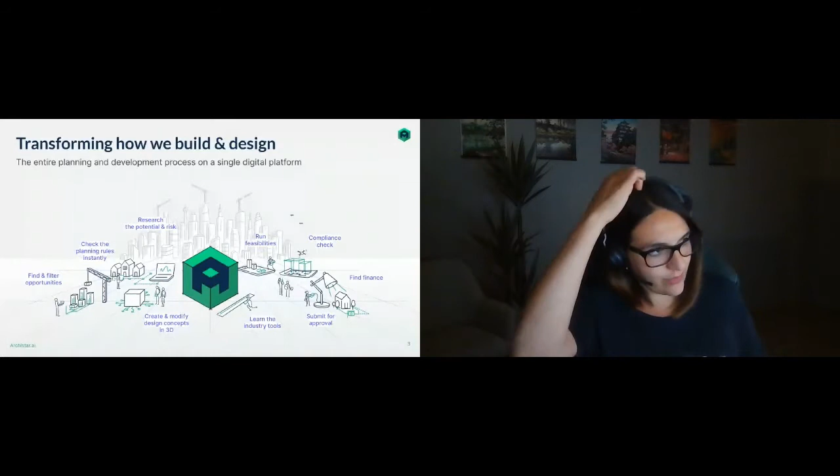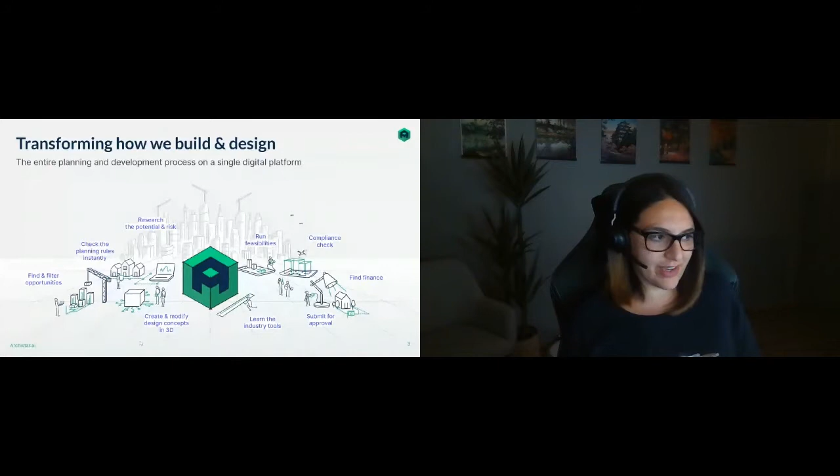First things first, we use it to find and filter opportunities. We use it to check the planning rules instantly anywhere around the world. We look at researching the potential and the risk of that specific design and development. From there, we then create and modify design concepts in 3D. We run feasibilities, we run compliance checks, find finance for those specific developments, and then go to submitting for approvals.

The idea here is that at Archistar, we really are trying to find a wholesome product that goes from finding and filtering opportunities all the way through designing, feasibilities, compliance, and right at the end, submitting for approval. So finding that whole design workflow as we go along.

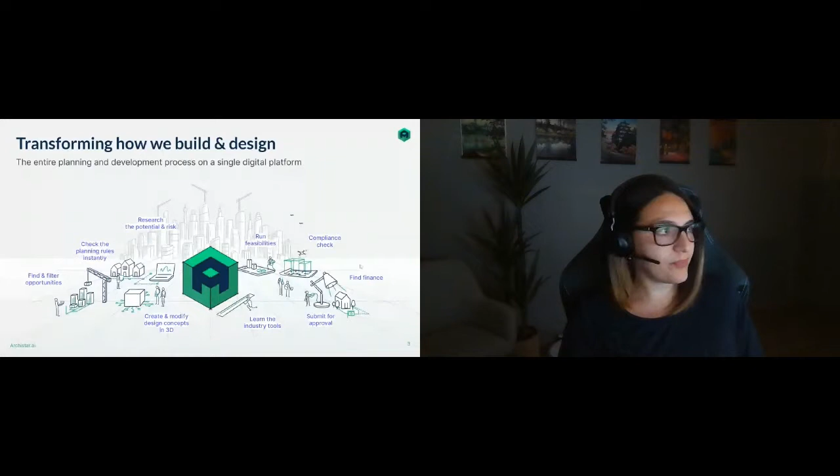Our clients and partners that we currently work with worldwide, a few big names there: CBRE, Colliers, Frasers Property, all the way through to some of these larger technology companies that we're familiar with: Autodesk, Rhino, Revit, and so on.

Like I said, we are based in Australia, however, we are a global company. In Australia, we look at mainly property developers, architects, designers, real estate agents, all the way down to home builders, banking, and universities.

And from universities, that's kind of where we started. Around the world, we have over 1,000 property and design professionals on our platform, and we actually have a lot of students on our platform. I think that number's a bit old, but it's around over 70,000 students now on our platform.

The reason is because we actually started off as an online academy. So we currently have Archistar Academy still going live, still going strong, and it's in all the major universities around the world. What that does is provide online learning for the AEC community on all things to do with generative design, photorealistic rendering, and all the main kind of programs to look at.

So Revit, Rhino, Grasshopper, and that's kind of where we started 6 or 7 years ago now, creating these online tools, really kind of teaching people from the ground up what the latest and greatest is in generative design. From there, we kind of said, okay, well, how can we start using our skills to start shifting the curve of what generative design looks like in the current architecture, engineering, construction community? What does this look like?

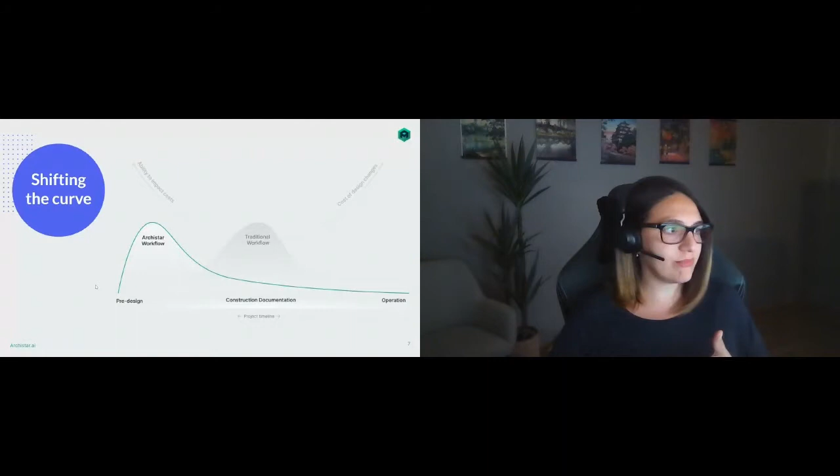So what we do at Archistar, we bring that large curve right up to that very initial stage of pre-design. So we look at, okay, firstly, what does your building look like? Is it in the right orientation? Is it going to comply to all your certain parameters and your workflows for your country and so on.

And bring all those quick back-of-the-napkin sketches right to the very beginning of that construction process. The reason we do that is because all those initial costs are quite cheap right at the beginning, so any major changes you make would be right at the beginning there rather than in the middle, and therefore that will reduce costs. It will increase speed later on because you have to make fewer changes and you'll be more precise in your workflow from that point onwards. So we're very much all about shifting the curve here at Archistar, and the things I'll present to you today will show exactly how we do that.

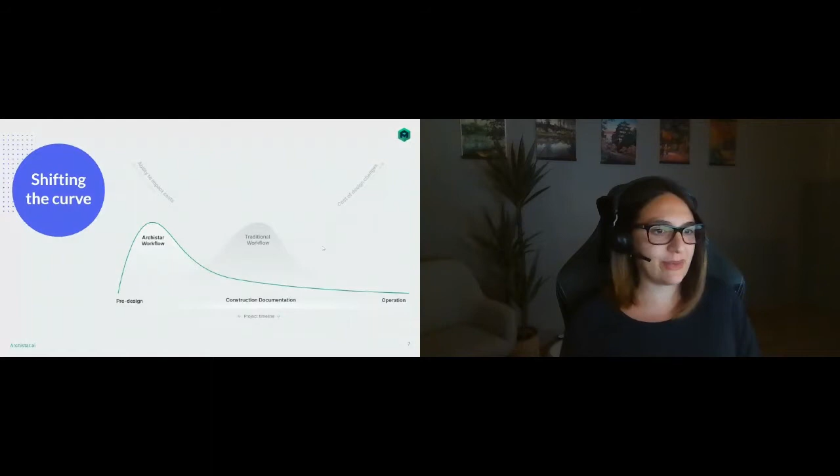Okay, so let's look at the key concepts and past applications for generative design. At the beginning, I always try to give a simple explanation of what generative design is, because it can get quite complex quite quickly.

So for example, if we're looking here at the design of a chair, we say, okay, what is this chair made up of? On the left it looks like quite a simple geometry, but on the right-hand side, when you start to break it down, you start to get all these different parameters. For example, here you have the width of the chair, the depth of the chair up to the seat, the whole height of the chair, the height of the armrest, and the depth here. So you really can start breaking these down into numbers, into geometry, as you go through.

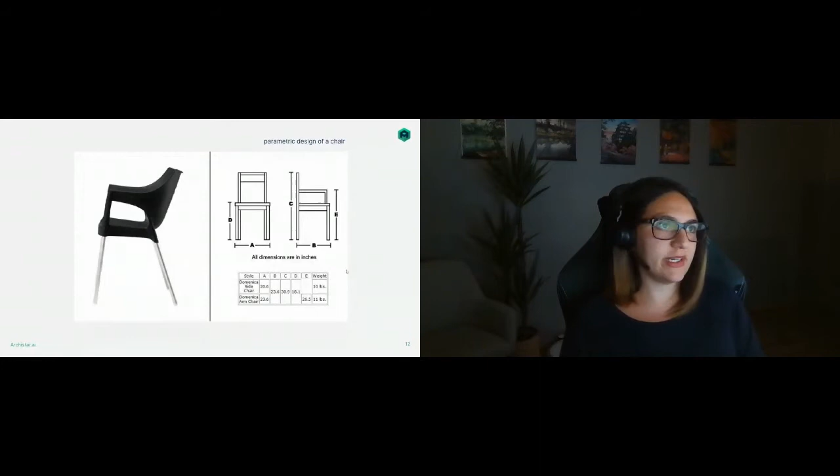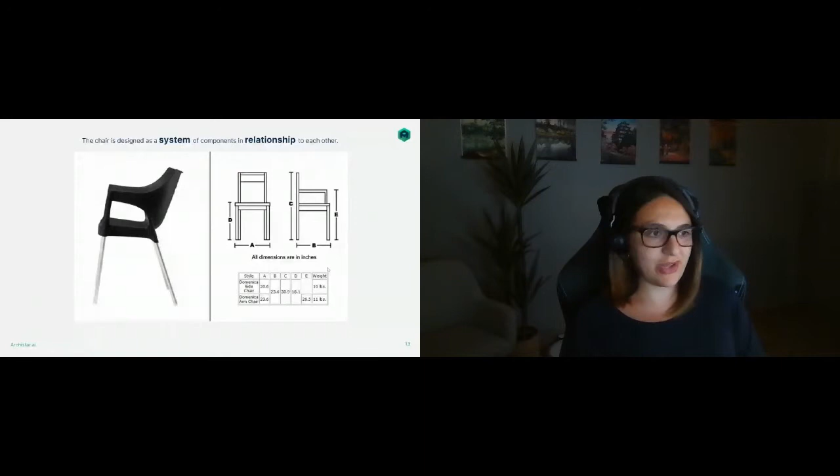By breaking this down into these parameters, you can then start creating a system of components that have a relationship with each other. The benefit of having that is that you say, okay, well, this is my chair, these are my components, and these are my variables now. So this chair is now just broken down into geometric relationships, all those different dimensions connected to each other, and these numbers now become your variables.

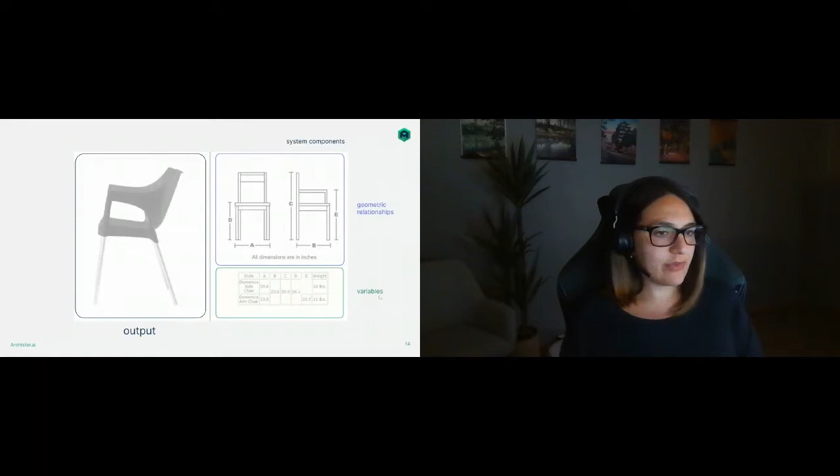So what happens when you change these variables is that the output now changes. If I change the width, if I change the depth, if I change the height, I'm going to see different versions of this chair appearing to me. Rather than having just one final output of a chair, I now have a system I can create to produce multiple chairs at once.

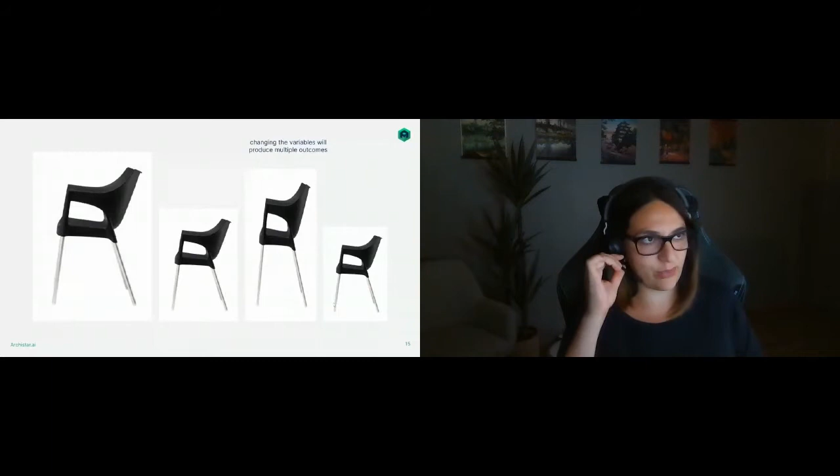So now we go into what we call simple systems. Rather than having one final design, you can start creating a system that can give you multiple designs. Rather than going from one chair, you can have 10, 20, 100 different chairs going forward.

Another example here is how this circle geometry can be affected by a simple radius from a point. If I start by initially saying, okay, my point is this close to my circle here, what happens if I move my point around? If I move it closer, is it going to shrink? If I move it further away, is it going to increase in size? How is this geometry affected by an external parameter?

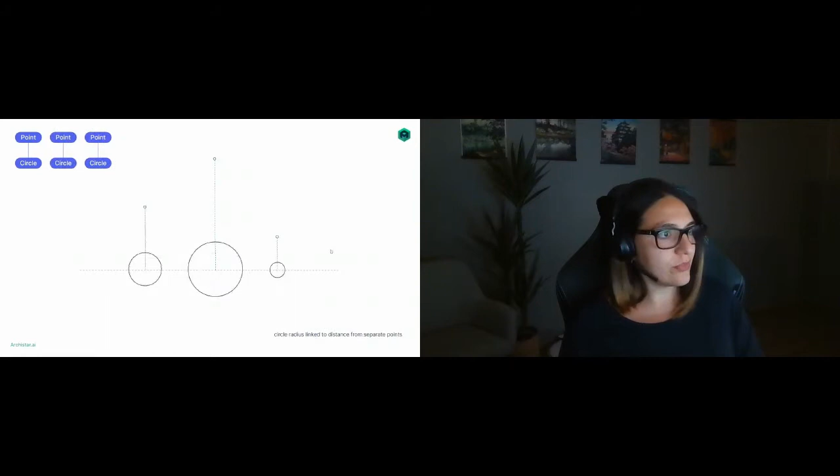So what happens if I do this for multiple points, and I drag multiple of these points around? How are these going to change according to the distance from certain points? And we say, okay, well, what if it's all from one point only? The further I move this away, the larger the circle gets; the closer it is, the smaller the circle gets. And you can see how now we've kind of created this system.

Of designing, where we have a circle that's linked to a distance from a single point. So how can we start bringing this into your architecture? This is kind of where we can bring in components. We've created a system, and now we're creating components that react to that system.

For example here, if I had a surface with 3 lines, one on this end, one in the middle, and one on the closest end to us here. What happens if I say, okay, this panel is going to twist according to a certain angle using my middle line there. And when I twist that, that component changes accordingly.

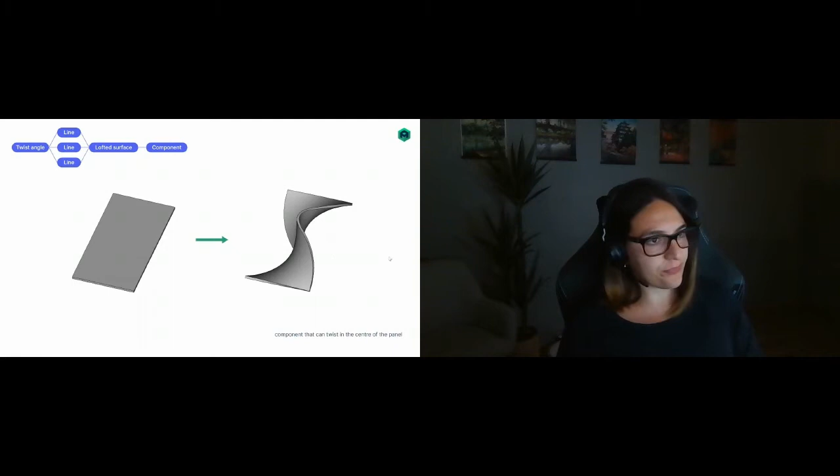For example, here, if I bring 6 or 7 of these panels close together, and they currently have no twist angle, and then all of a sudden I add in an angle, as we twist against there. You can see how we can quickly start to create this very parametric design. And this is with one angle there.

What happens if I bring in that point system? I say, okay, according to this point here, any panel that is closest to this point gets more of a curve. I can start bringing in a law curve into this and say, okay, well, if I have a curve that has different points of highs and lows, my parameters are going to change accordingly. And I can start getting these really funky designs out of it.

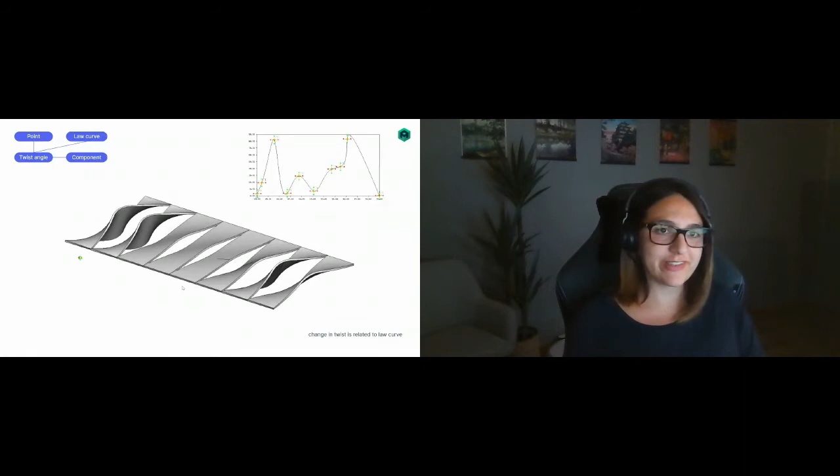So you can kind of see very quickly how some very simple systems and components can very much affect how we create new architecture, create parametric design, and get to some really funky designs in the workforce.

Grimshaw, they have a very simple system like this where they have different panels with different twists and turns, and you can see how easily you can start creating these really funky designs that are currently out in the world of architecture. Even the same thing here.

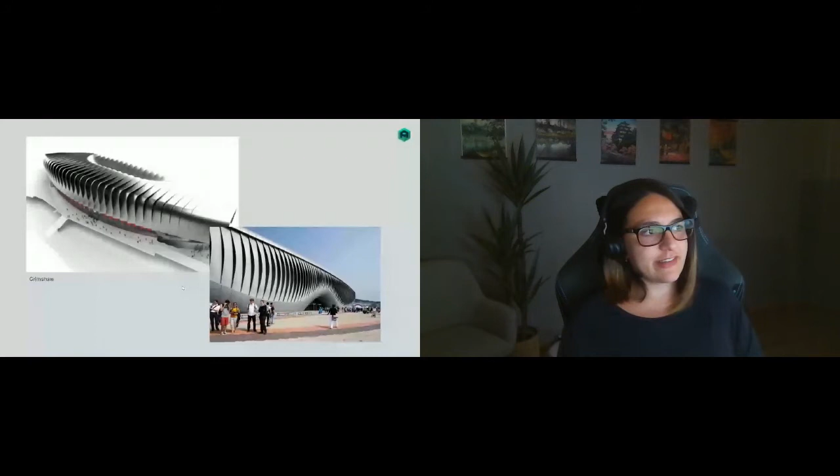So I guess once you actually start getting to these funky designs, you say, okay, well, actually, how do we build this now? It's like, this is really cool, but what's the next steps from here? How the hell am I going to build this thing? This seems crazy.

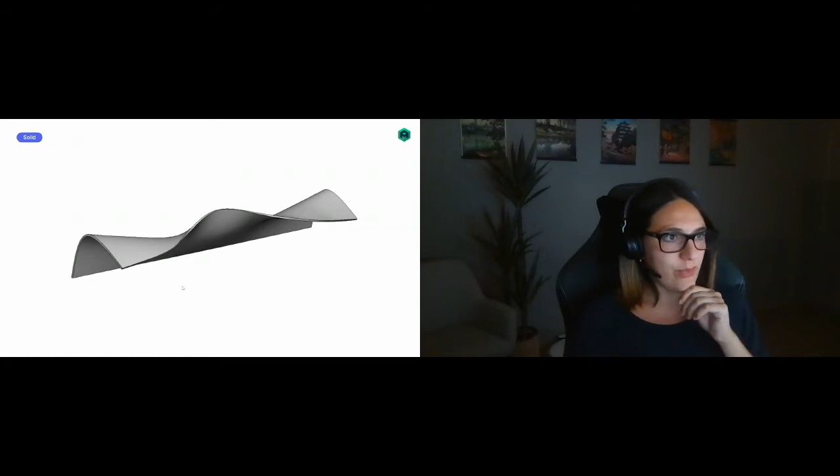So this is where parametric design also comes in, especially for the construction industry. We're very much linking here, architecture, engineering, construction all together in one. So from here we say, okay, well, I have this design that I've modeled up in 3D. Everything's kind of malleable. I can change it around whenever I want to. I should be able to do the same thing for my engineering and construction.

So what we can look here is that we can take this geometry and we can say, okay, well, across this geometry, I'm going to put a central kind of spine in the middle. I'm going to split it up into equal frames and start splitting that geometry at those frames. So my geometry has a thickness, and I'm going to start taking out the structure at those different thicknesses there.

I'm going to automate it. I'm going to put it into a 2D platform and cut them out in a laser cutter and use that as the structure for my structural framing profiles. So you can start really kind of very quickly extracting the forms from these new freeform solids.

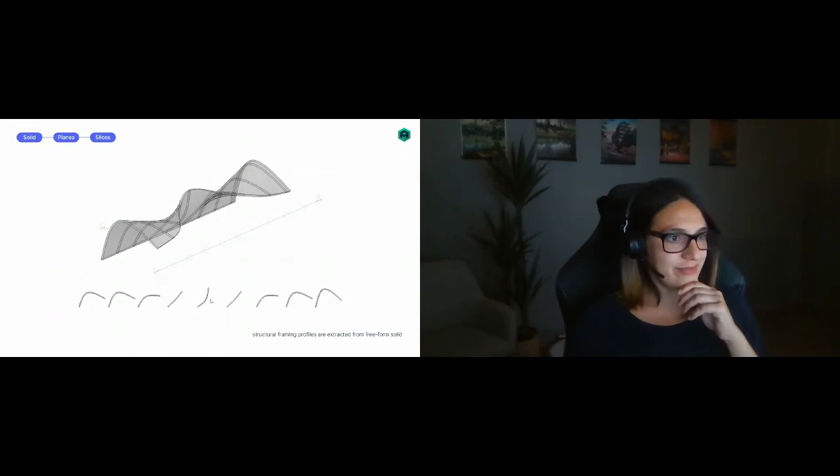And because you can start doing this, and the technology is out there with robotics, laser cutting, all these new kind of technologies, this now becomes possible to start creating these really cool new designs. And because it's coming directly from the geometry itself, it's fast, and very precise, and evidently very practical at the end of the day.

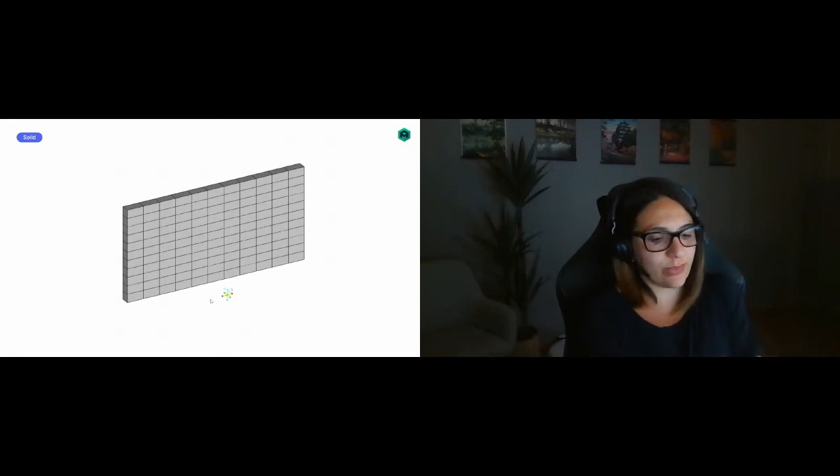Another example here, you have a solid brick wall. Each of these bricks is one single component. I can start rotating these. So I can start putting in a rotation on each one of these bricks. They look like bricks, but there's just simple geometry in the architecture and generative design.

But I start giving this a rotation angle. And once you have a rotation angle, then you can start saying, okay, let's bring back that point geometry and start saying, okay, well, the closer you are to this point, the less you're going to rotate. The further you are away, you can rotate it more. And as you go through, you can start seeing how this can be applied in real world applications.

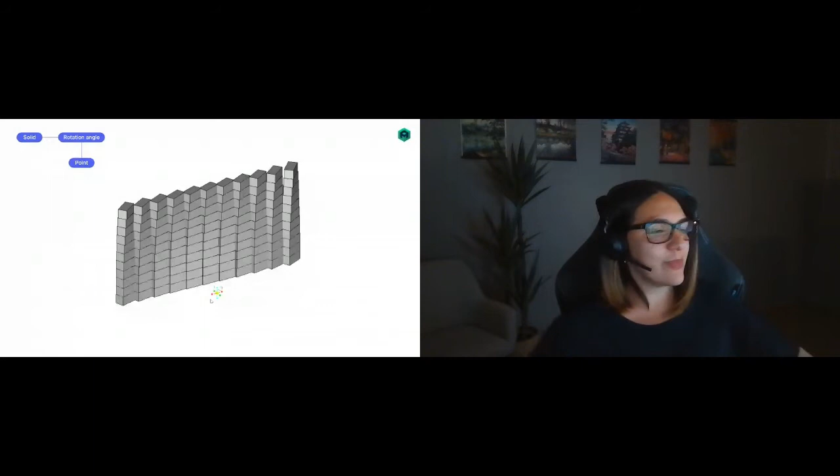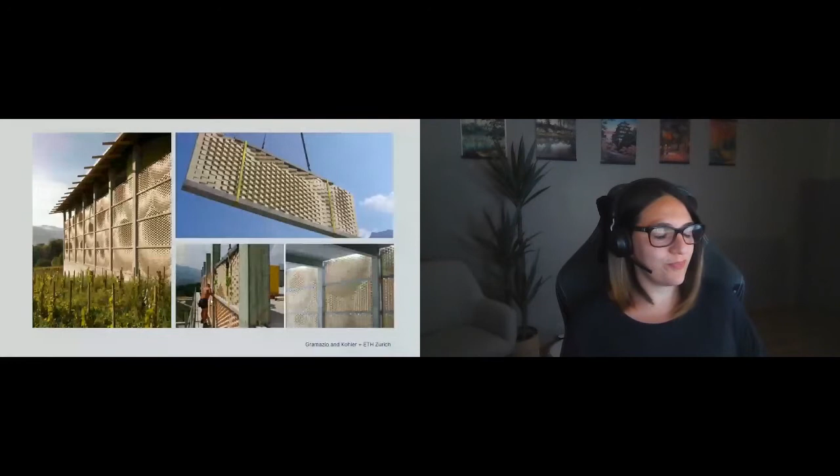There's really kind of very simple components, there's simple geometry, and by applying some very kind of lightweight generative design and parametric design features to this, you can get some funky designs coming in as you go through. This is a Gramazio and Kohler with ETH Zurich project, which uses exactly this method of designing, which is really cool.

As we go through and produce all these really cool designs, we need the engineering and construction processes to back it up. This is where you come in, with all your really cool functionality like robotics and laser cutting and other really cool techniques. You do need the latest technology to do this sort of stuff.

You can't do it manually, but there is a lot of really great technology out there that can start picking and placing these directly from code in the computer. For example, with robotics, it takes code directly from a computer program and starts placing these one by one in a specific order according to that program, which is really cool and also a lot faster than manual use. It's really exciting what is possible out there.

And this is just using even the most basic parametric tools that are out there so far. So from here, we start looking at, okay, well, we have these ideas. How can we start using them? Let's explore these evolving ideas as we go through.

Archistar was originally created by Dr. Benjamin Coorey, who has a PhD in generative design from Australia and is also a global leader in parametric technology. He started his PhD about generative residential design, looking at how these spaces in a house, in an apartment, are connected to each other. What is the relationship between spaces?

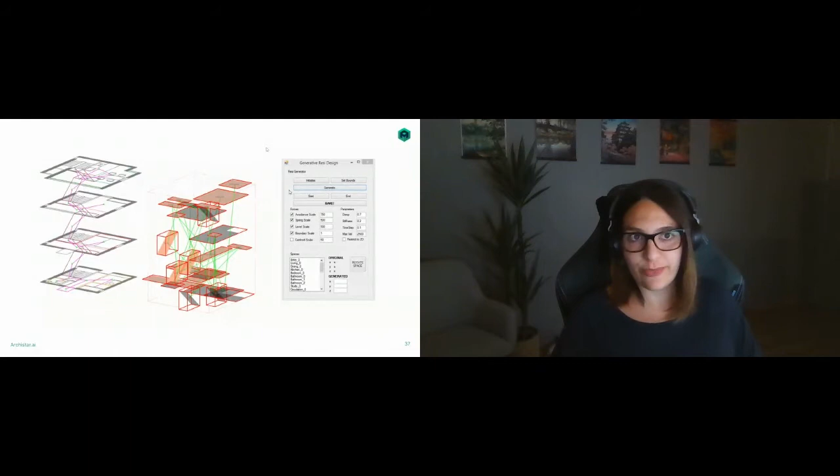So he built a small plugin in Rhino and Grasshopper and said, okay, well, what if I start just giving this a mind of its own, creating all these different components, giving them different rules, different connections that they can go to, and just start letting it go for gold.

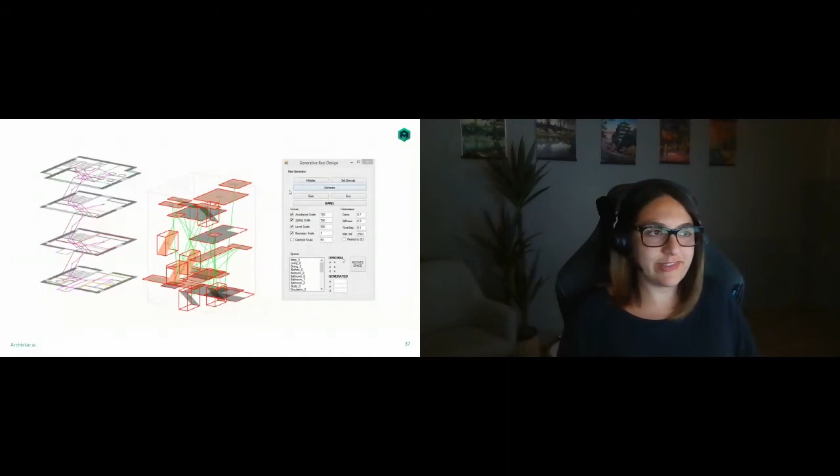This is kind of where you can get really funky with generative design and architecture, pushing the limits and really going further than your traditional thinking of what standard residential housing is. The result is that you get all these different kind of crazy forms coming in. We're really redefining that initial workflow of architecture, what it looks like, and what the possibilities can be. So this is like 15 different types of options of what you can potentially do in different spaces.

And this was 10, 15 years ago as well, so right at the forefront of when parametric design was very much taking off. You have simple geometry, simple components, all working to produce multiple outputs.

So we've taken this as our base for Archistar, and we've gone ahead and said, okay, how can we start implementing this into practice? There's a lot of stuff you can do that's just very unusable in architecture - you can look at all these crazy designs that will never get built. Or you can start using these tools to be very practical and use them for businesses, and it's becoming more widely acknowledged in the architecture, engineering, construction industry to use parametric design and generative design to speed up processes.

So this is a few examples of what we've done for some clients here in Australia and globally, and this is how other companies are using them as well. For example, Woods Bagot - you can easily see how they started to create these very lightweight structures using parametric design. They have canopies, tree kind of structures. You can see gaps between these solid, freeform models, and they've used the design of those models to directly create structure from them. So we're very much looking away from heavy structure, ugly engineering, and moving towards very beautiful architecture based directly off the geometry itself.

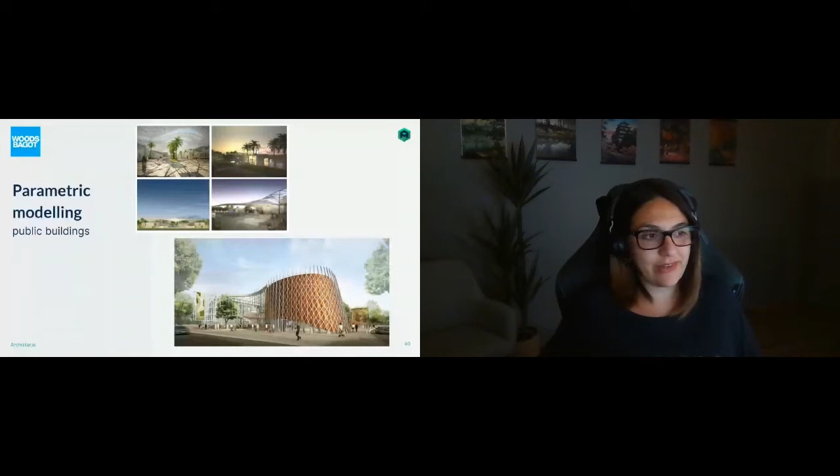Other examples were how Populous created a stadium bowl generator. Firstly, it looks at how to create this bowl that we're looking at, and they directly used this to create one of their stadium bowls for one of their designs. That just uses Grasshopper and Rhino, changes all the different parameters around it, and creates a structure from there.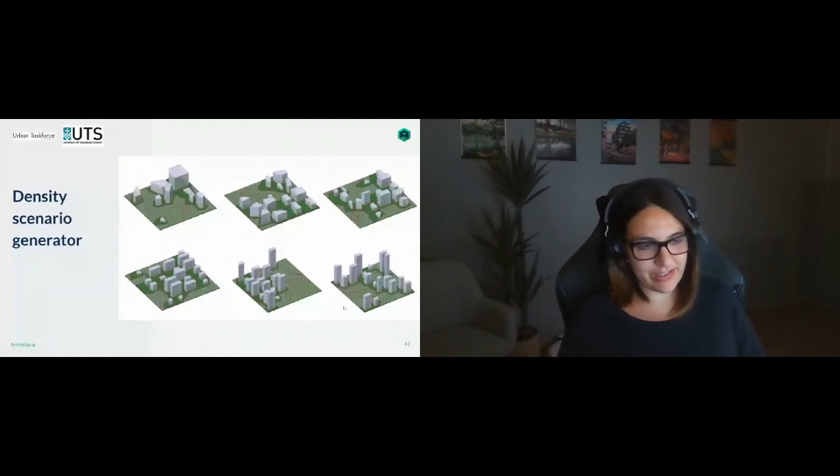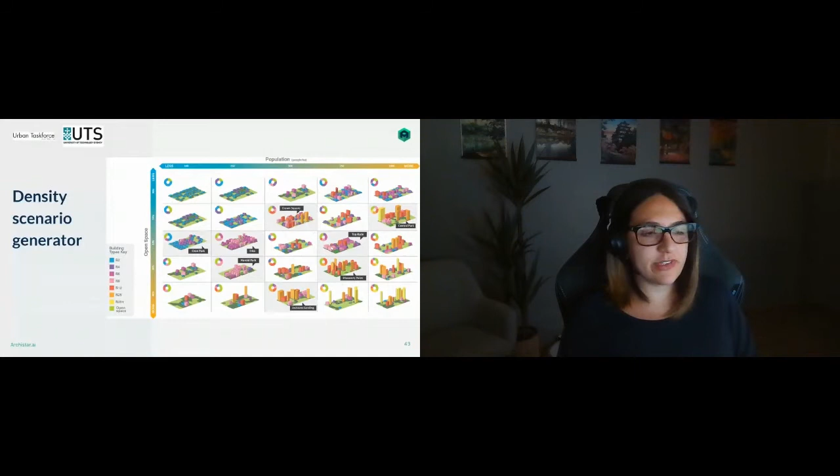And this was the output of it. You have all the different colors, all the different types of building designs, color coded according to what they are. At the end of the day, you can take these designs and move them into other programs and further develop them from that point onwards to actually be built.

So while a lot of those things—some of them real life—here are some more recent real life applications of how we've used generative design at Archistar.

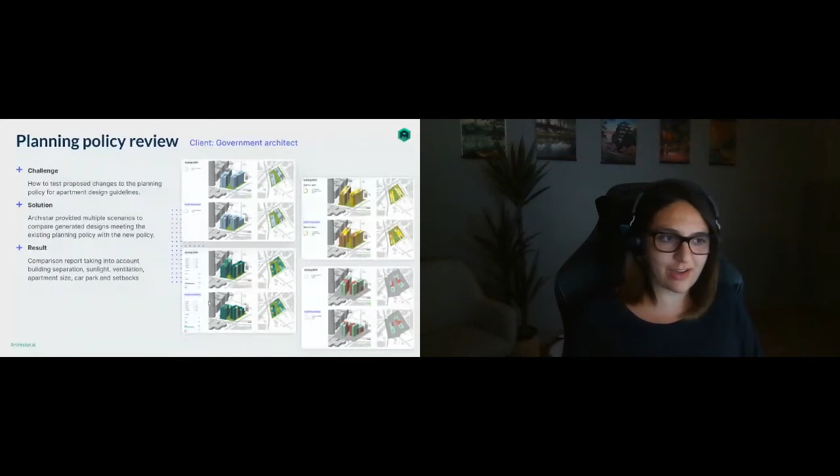So there was a bunch of different things, and it wasn't just sunlight, but also looking at privacy spacing, building mix, ventilation, and so on, including car parks and all that sort of stuff. You can really start seeing that while we have very heavy geometric aspects to architecture, you can also go into analytics and compliance using the very same systems.

So in saying that, we said, okay, we have firstly all these really cool design tools. We started off as an academy, saying here's all these cool tools you can use, going from your very basic Rhino, Revit, Grasshopper, Python, C#, all that cool stuff. We said, okay, how can we start bringing generative design into the architecture, engineering, construction community where you don't have to have the best specific skills to use this stuff? How do we provide generative design for all? This is where Archistar really came into play about 5-6 years ago.

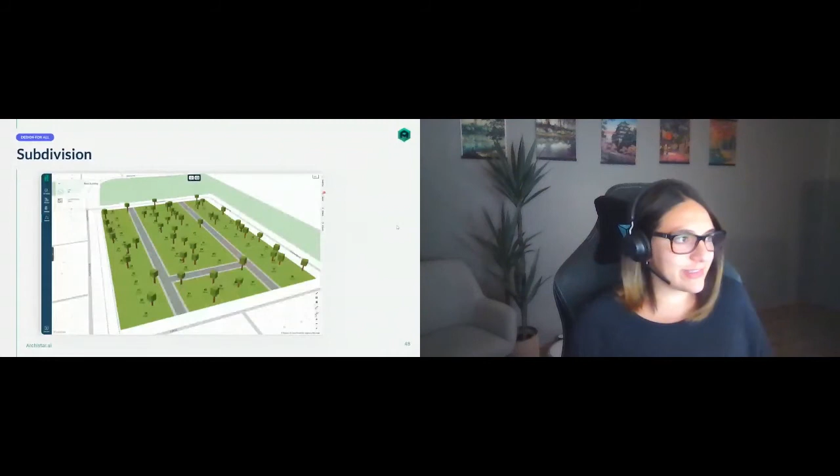We wanted to provide practical generative design in an online platform for everyone to use—your basic mums and dads, home builders, developers, architects, and so on. So we created a system providing dwelling types from low density subdivisions, townhouses, duplexes, terraces, placing it on a platform where you can generate designs yourself without any help. You don't require any code or generative skills. All you need is to put a certain set of parameters into a website, and we'll offer you hundreds of solutions matching those parameters.

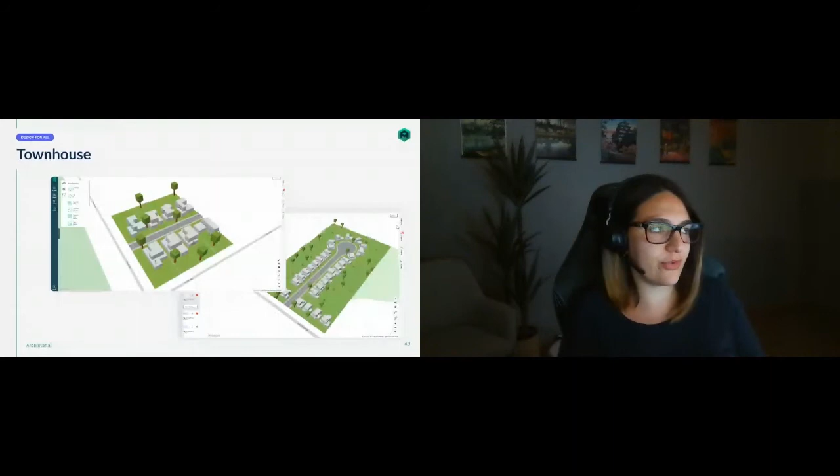We started off small, going through townhouses and subdivisions, and let's go to high density as well—apartments and commercial.

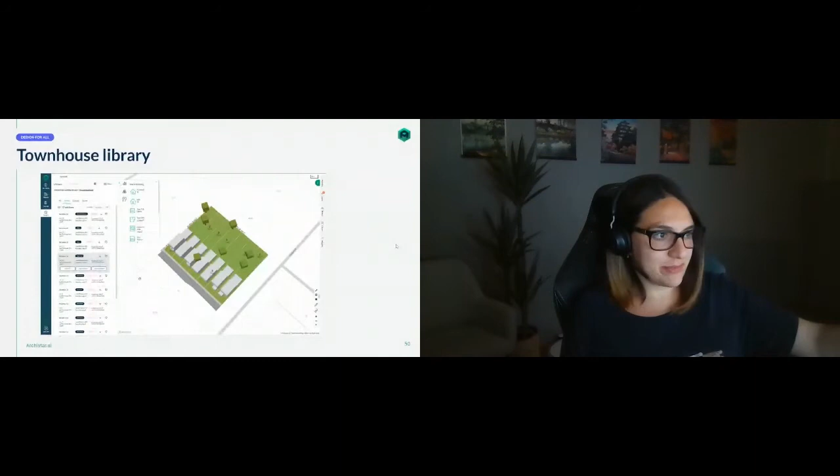An example of how this works: you look at different townhouses, with all these different design libraries—horizontal rows, wrapping around, central driveways. On the left-hand side you see different design solutions popping out automatically within seconds using our system. It's all web-based—you just log into an account and see these different strategies appearing quickly on your site that you can start playing around with.

The benefit is that at the beginning, all you have to do is select different strategies—you don't have to code a single thing. For every single strategy, we provide outputs as well: how many dwellings did it achieve, how many lots, what's my floor space ratio, my gross floor area, my footprint area, and so on.

As you go through, there are multiple different types you can do—attached housing, manor housing, terrace, and so on—building this for all people to use rather than just the experts.

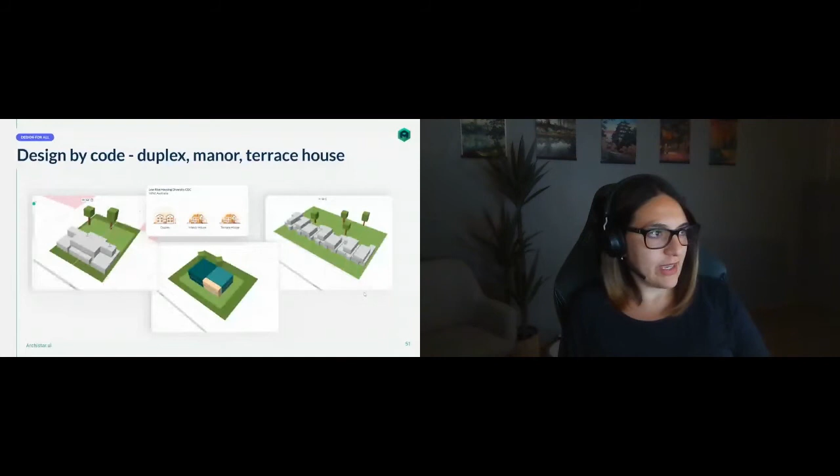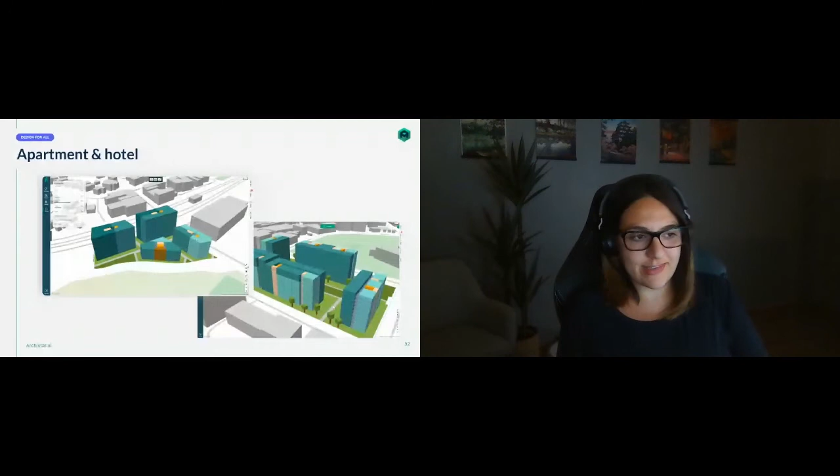This extends out to mixed use designs—start adding in your retail, your podiums, your commercial, and so on, stepping down these buildings to get more funky designs. Same thing with commercial designs: you have your cores, your floor plates, your windows on the edges going in from podiums and so on.

And all this works directly off a set of parameters—you simply input a set of parameters and you can start getting all these designs from here.

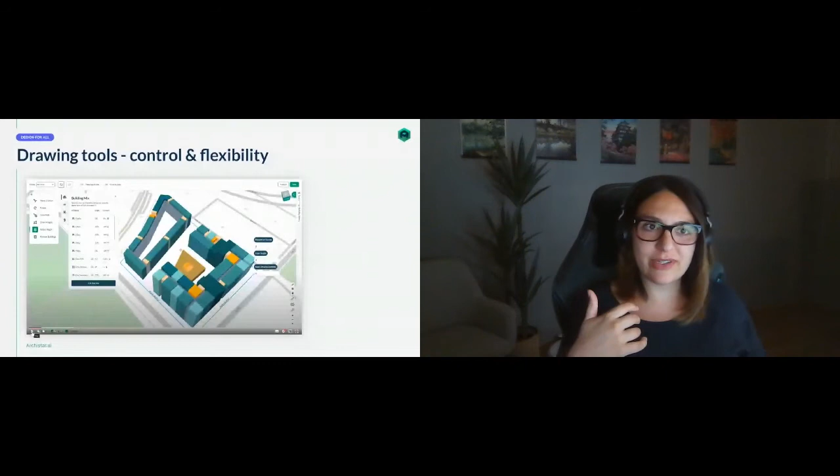Once we had these designs popping out, a lot of people said, okay, this is great, but how do I edit this? Can I move this around? I like that I can get all these designs and analytics coming out of it—how can I start plugging and playing with my own designs?

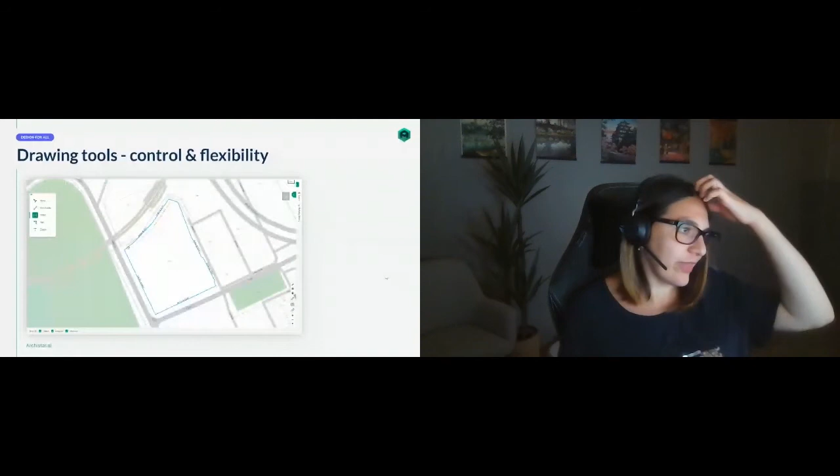So we developed tools we call our drawing tools and edit functionality. Here we're starting on a site—we've developed tools where you can draw in your own guides, so you can say I want it 3 meters from this edge, 6 meters from that edge, join these guides together, and start drawing buildings according to these shapes.

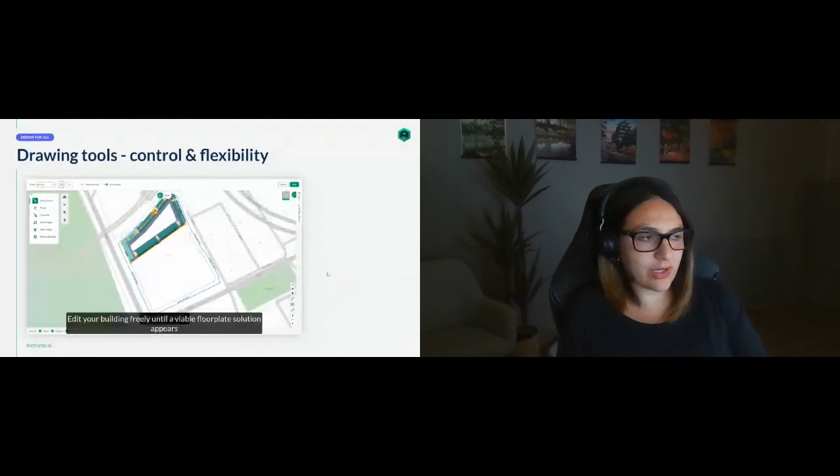So here they're drawing buildings according to the new guides we've put in. The tools are smart enough to tell you that if you draw it like this, that part in the middle isn't going to work—it'll turn red so you know you need to fix it. You can start editing, dragging and dropping different points to get different designs as you go along.

As you draw here, the system is smart enough to pick up that this part of the building is too long—I need to split my building into multiple sections so the egress isn't too far away from each other. From there, you can build up your different heights.

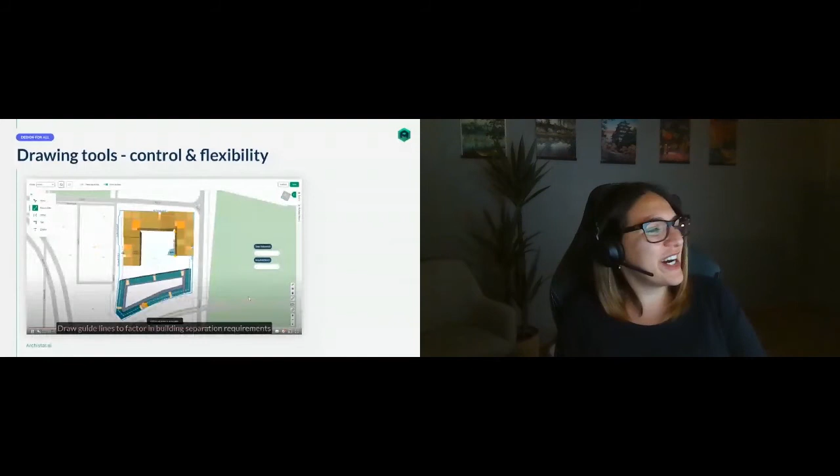I think it's kind of chopping and changing as you go through here, but you can start by saying, okay, I want to draw more guides in here. I want to offset it 12 meters from each side there. And then I want to draw in a building in that leftover space, so I know it has enough privacy spacing between these buildings.

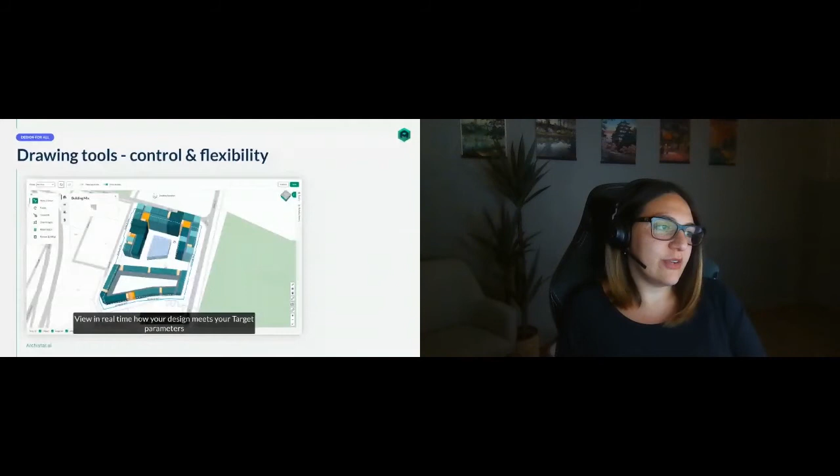So it really is bringing that CAD, that BIM software all on the web for you to start playing around with, and very quickly doing a lot of these back of the napkin sketches and getting the information out of it. So as you're doing this, all this information is being uploaded live.

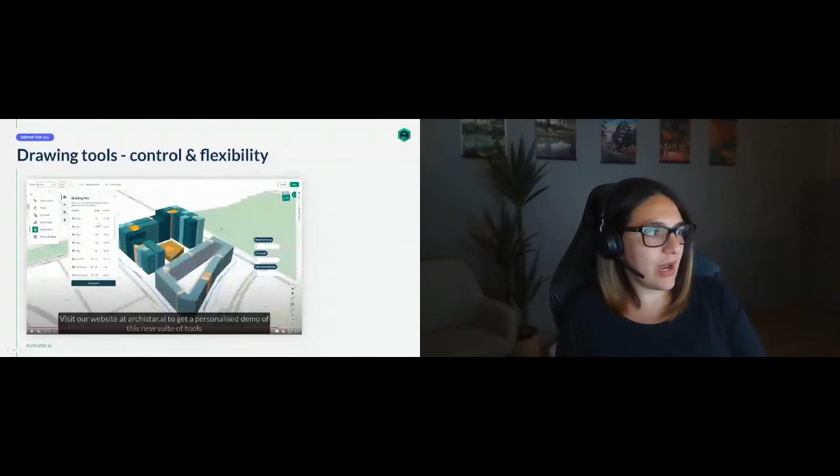You can see, if I go back here, I have a target mix that I want to go to. So I want to get 30% one bedders, 60% two bedders, 10% three bedders. With this current design, I'm currently at these numbers here, 22, 54, whatever it is. This is my total floor space ratio. I have room to move. I could add more stories on here still, and so on.

So there is kind of that benefit of having real-time analytics coming back to you from these designs.

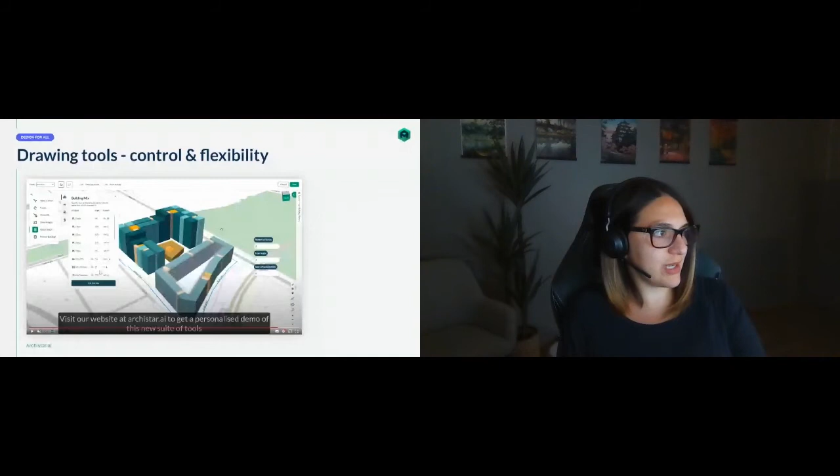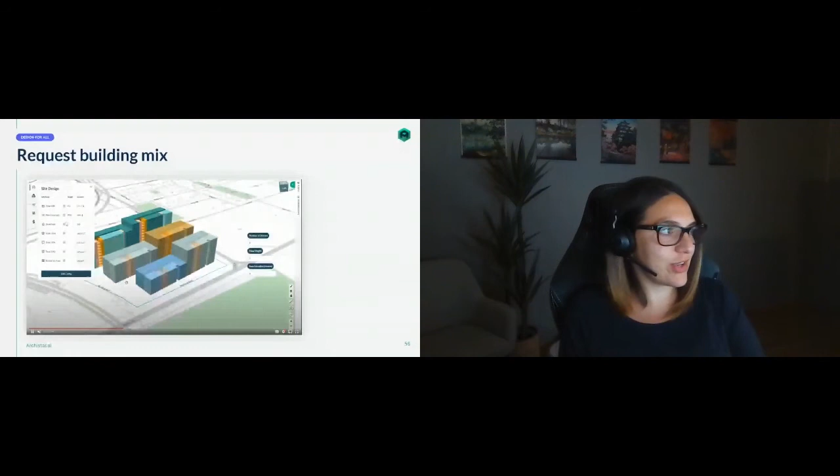And from here as well, you can kind of work backwards. So I can start off with the design and say, okay, initially I wanted to have, if I go back here, 10% or 40% one bedders, 60% two bedders. I'm going to change my numbers around, and my building is going to update accordingly as well. So you can kind of see how very quickly you can even take an existing design that we've generated, or start drawing your own designs, and then work backwards and say, okay, what happens if I change my target config to this, or I change my heights to this, what happens?

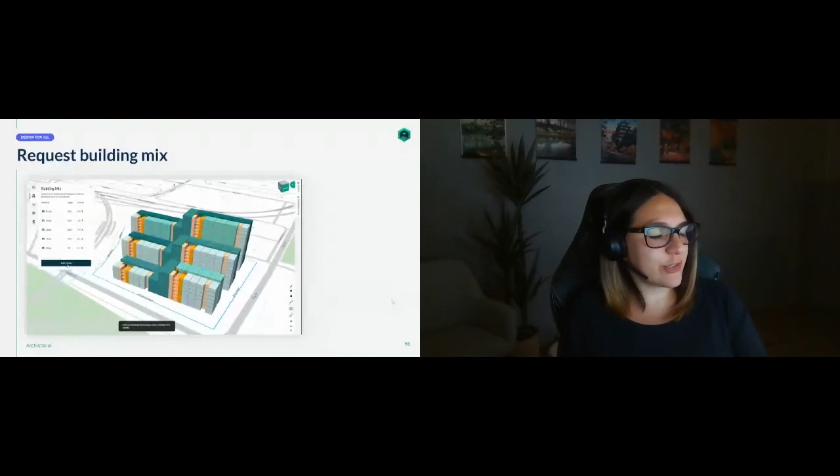What if I move my buildings here and there? And how many more apartments do I get? How does this affect my feasibility? Is this now more feasible? And does this work for what I'm trying to do here? So it does kind of work both ways. You can go from the ground up, or you can work backwards depending on what you're doing in your current designs there. So I guess this is all very much in our platform.

And it's all live. We have thousands of users currently on it. But every day we get different people asking, okay, this is really great, I've kind of got what I wanted here, but I want to take it out and do more work on it. Can I take it out and put it back in? And the answer is yes, like again.

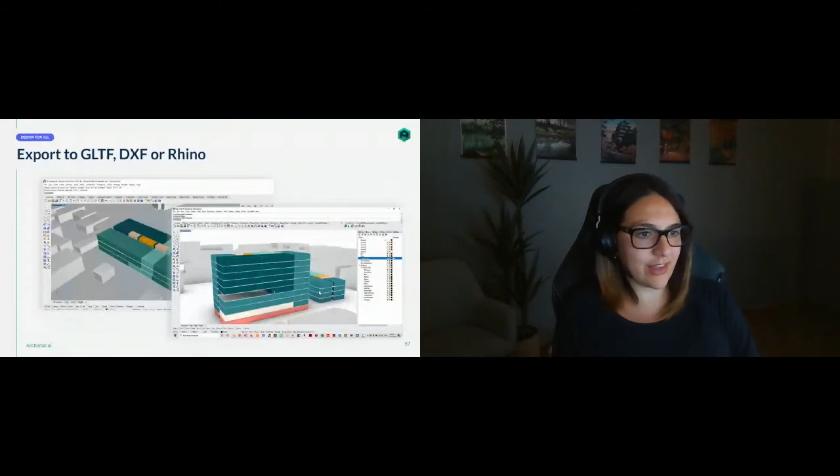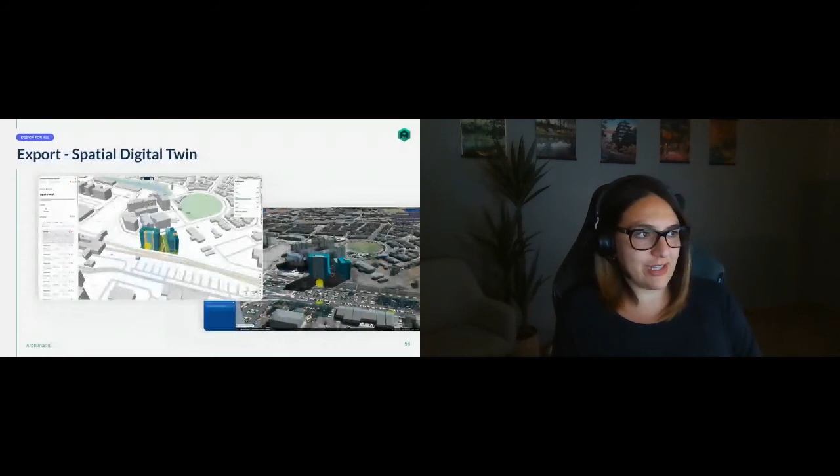So you can bring it out as a GLTF, as a DXF, or into Rhino. Very much coming up, Revit and so on, and more programs. But you can start editing these designs in other platforms. You can export it to different digital twins, get further information, shadows and all that sort of stuff as you go through, and start creating these really funky designs, bring it back to the system, all weird kind of circular stuff. And as you bring it back in, you get all the same analytics that you would for a normal design in our system.

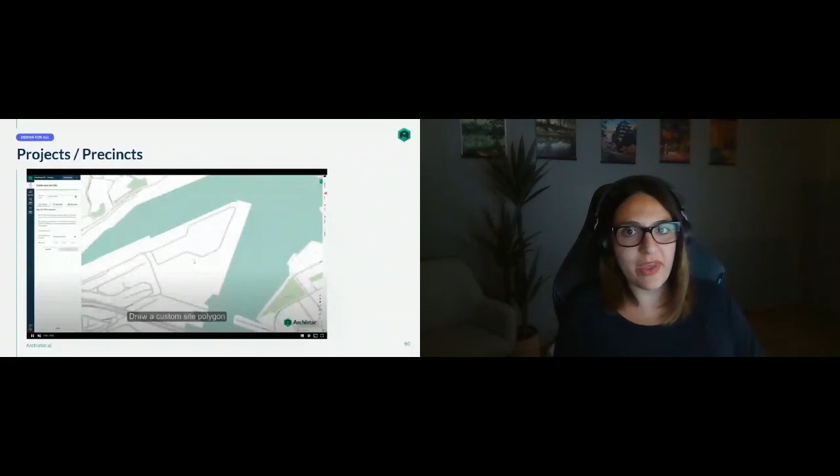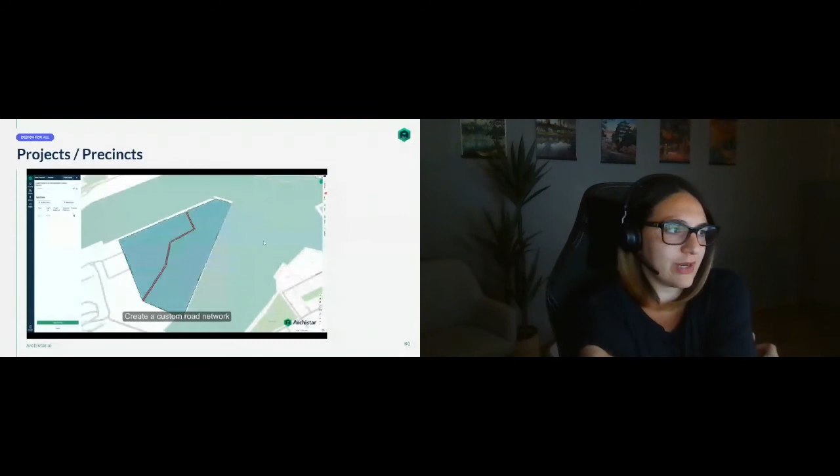So an example of how this would be used on a larger project scale is that you're saying, okay, if I wanted to start off anywhere in the world, I wanted to create my own custom site. So I could start doing that. I can start drawing in my own basic roads, drawing all the different stuff here, and creating different road networks with different widths, different depths, as we go along. As you go through here, each one of these will split into its own certain number of lots as you go through. And when you're happy with that, you can start pressing OK.

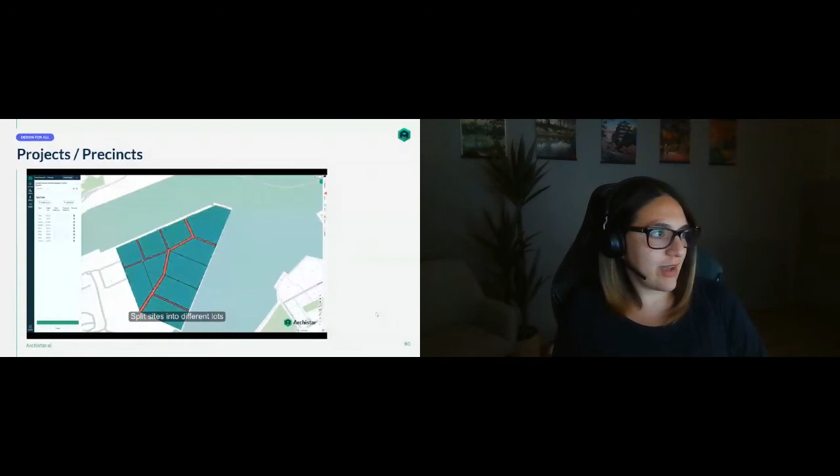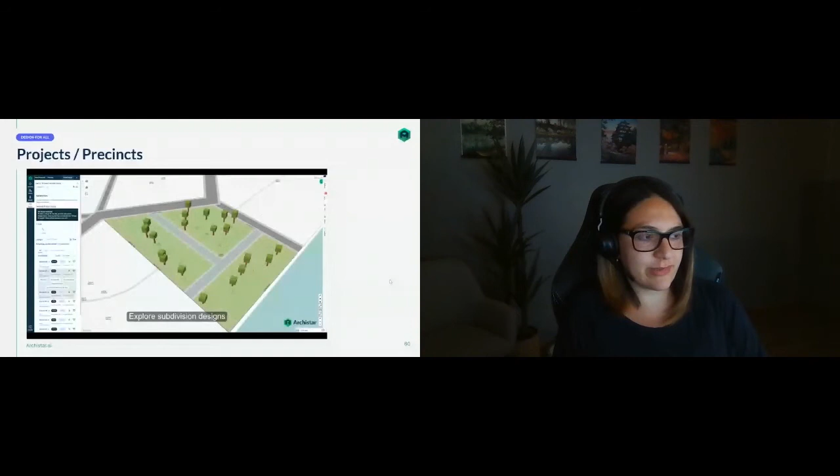Well, I want to select this site here. And I want to start generating, say, for example, some subdivision designs on this one. So I can set my parameters. I can say I want it to be offset 6 meters from here or 5 meters from there, whatever it is. And I want to start placing different subdivision lots on this specific design. I'm going to quickly choose one that I like, choose it for my project.

And then go through and say, okay, I'm going to go in the lot next to it and say I want to create some townhouse designs on this lot. Same thing, you put in your parameters. You very quickly change what you're looking for. You can view what your design is compared to other designs directly on the site.

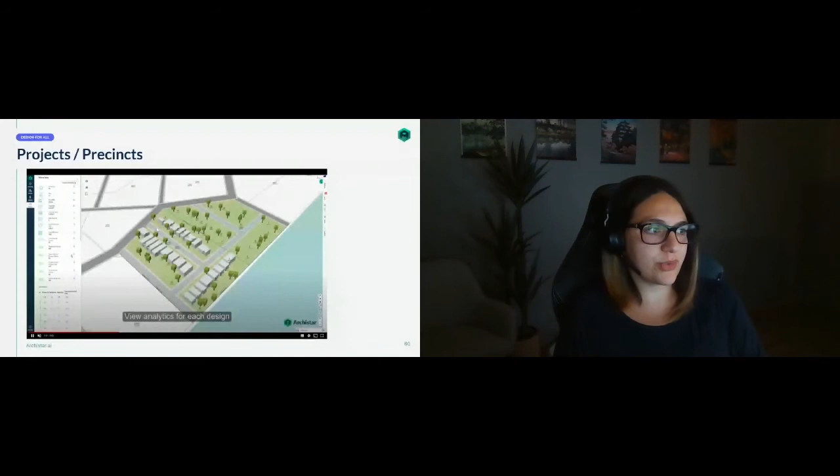And each one of these have analytics. Does it fit within my building envelope? What does my lot schedule look like? How many dwellings did it achieve? And you can start moving up to larger scales of density design as well.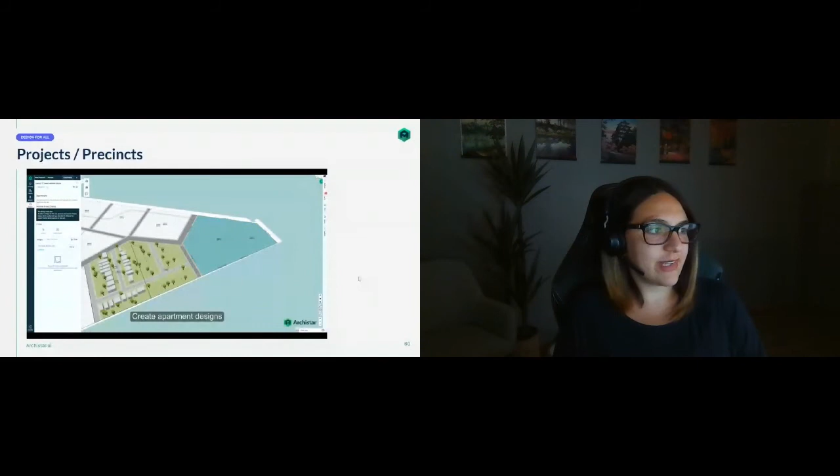So for residential apartment designs, I want to put my parameters in. I want this percentage of mix. I want minimum sizes and dimensions for my apartments, my balconies, and what designs can I get from here?

So from here we have different views. We can look at car parks, we can look at shadows, and you can go from basic building designs to some really kind of funky ones as you go through.

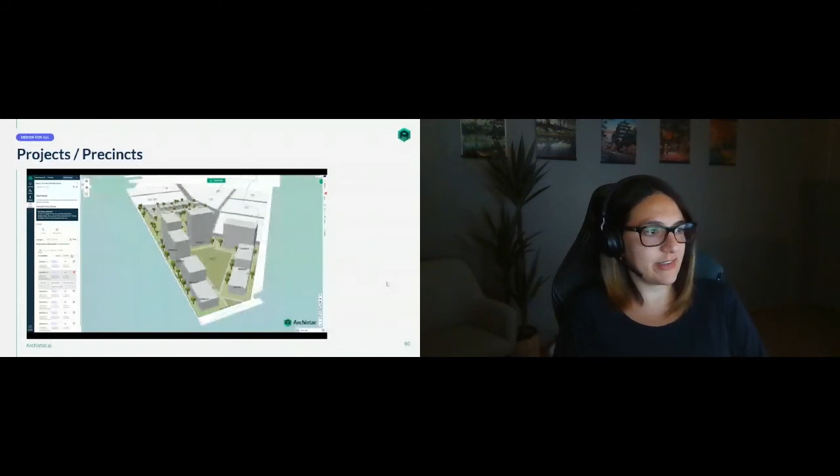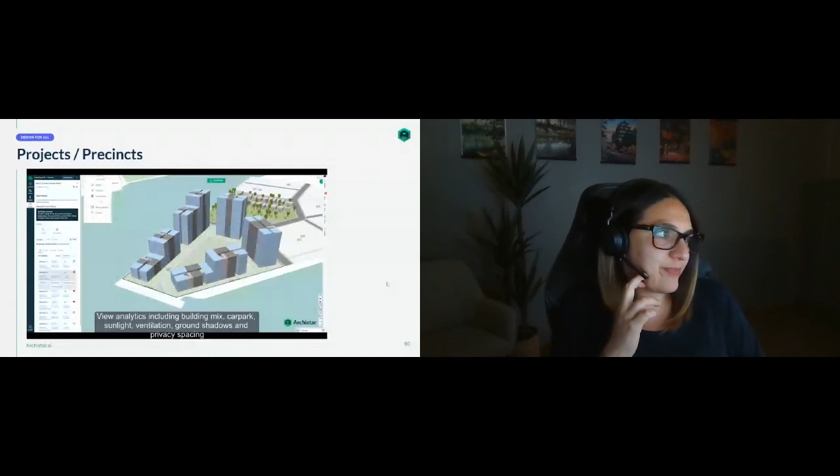And the benefit here is that you're not just working on one lot anymore, but you're really looking at what this looks like in comparison to everything else I'm building in this master plan site. I'm looking at sunlight, ventilation, privacy spacing. Are my apartments too close to each other? Do I need to expand them out? Do I need to add in different shades, whatever it is, to make it compliant in these areas? And you can start building different types.

So we've already done subdivision, townhouses, apartments. Now we're looking at commercial buildings, all within this one sort of master plan area. So the idea here is that it really can get quite complex quite quickly.

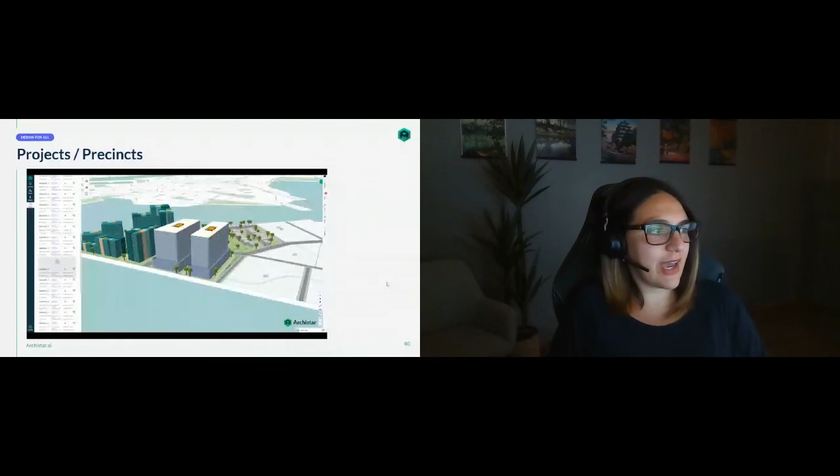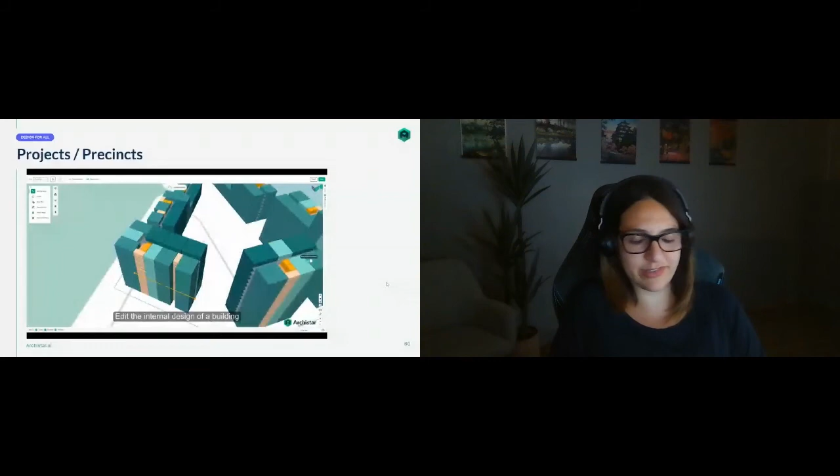And you don't have to have the greatest skills in the world. You don't have to be the best of the best to start doing this stuff now. We really are bringing this kind of generative design, parametric design, and being able to change the internals of a building very quickly to an audience globally, all around the world, rather than just the best of the best in the best companies, which is really exciting.

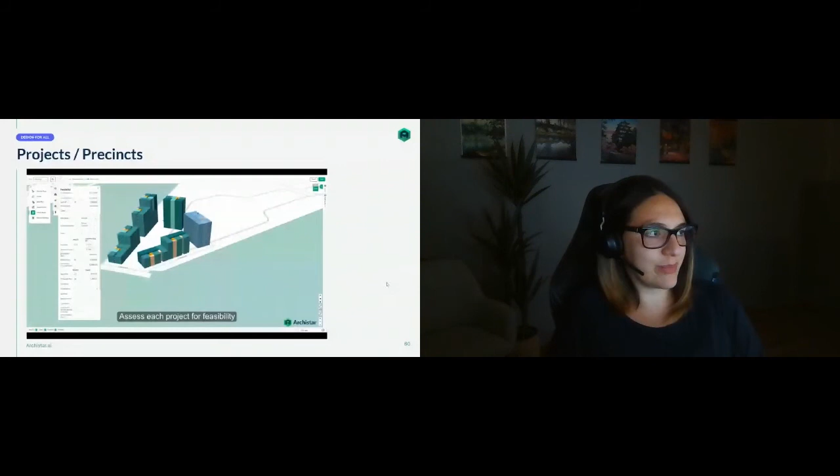And the more we get into this, the more we'll be able to write your own code and upload your own things, and really check: is this compliant? And then run quick feasibilities, put numbers in here. If I sold my one bed for this much, my two bed for this much, and my development costs were this much, would it be feasible for me to do this design on this site?

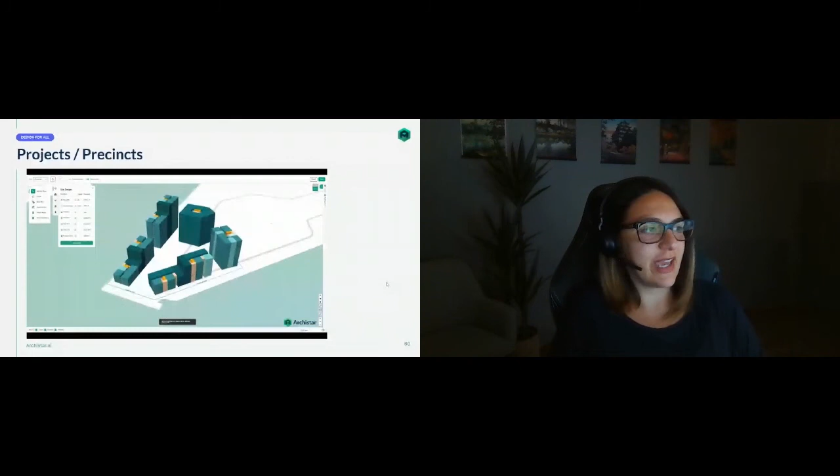And this is kind of where the real power of generative design is, and how you can really quickly create these great designs, with speed, with precision, and get to these points of creating really cool designs here.

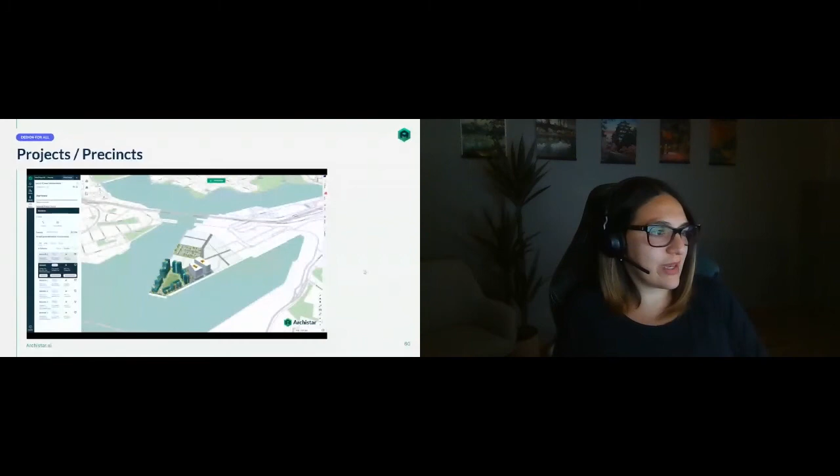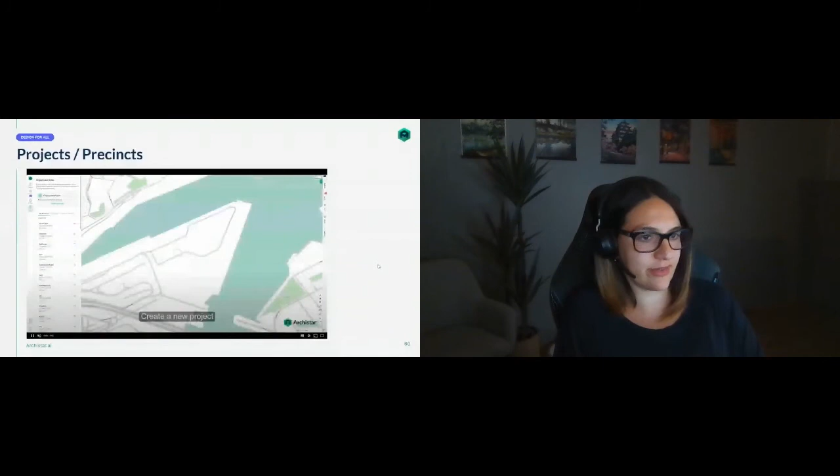So this is kind of where we're headed, where we're at now, and there is a lot of stuff coming in the future as well in these cases. But what you've seen here is, if I go to the next page, you can kind of see where the strength is in generative design.

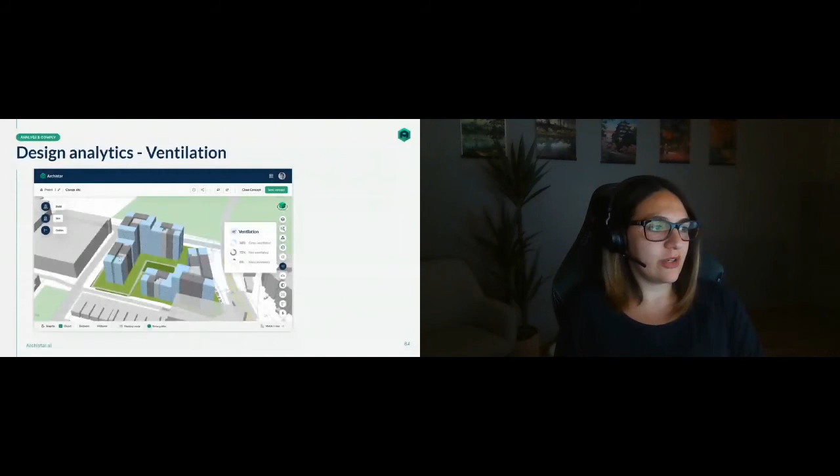So we're looking at analytics, compliance, going through building mix, getting all the relevant data directly out of this, looking at design analytics for sunlight, how many hours per day does each apartment receive? All this kind of standard information comes automatically with all these designs that get generated. So not just one design, but hundreds of them get this automatic real-time analytics directly from this, looking at ground shadows.

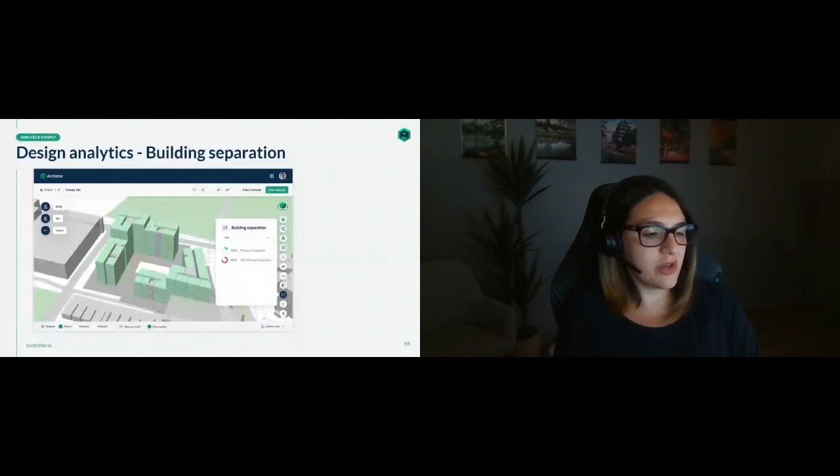And the idea here is you really want to make quick decisions right at the very beginning when you're designing. Is my building compliant if I went ahead with this? I don't want to have to go through 4 months of my project only to know that my building is actually not compliant, and I have to make huge design changes to do this. And does it have enough deep soil? Is my car park okay? Is it feasible?

And by being able to bring all this process within minutes, or doing this within half an hour at the very beginning of your project, that's really where the speed and precision come into generative design. So this is definitely the way of the future in what we look at for these designs.

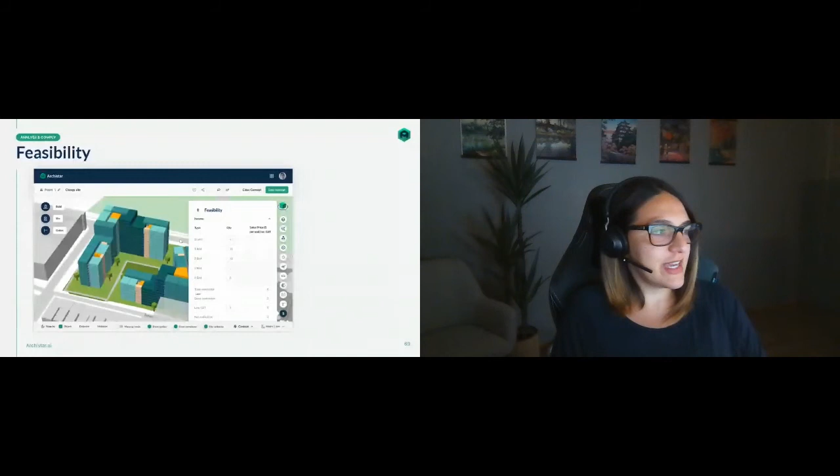And it's all about being very clear about what you're looking at. I want to compare different designs together. I want to see my analytics very quickly. I want to see if my site is correct as well. Is this the right site for me? And by being able to do this all in one platform, this is where Archistar really shines in this area. And at the end, you can just quickly download on the fly a development due diligence report. It's about a 30-page report.

It shows you all the different sorts of insights, what's recently sold around the area, your planning details, your zoning, your land use, all the way down to value estimates for your land, comparisons for designs, and more feature designs in detail. So that's kind of where we're at in terms of what we're doing in this space.